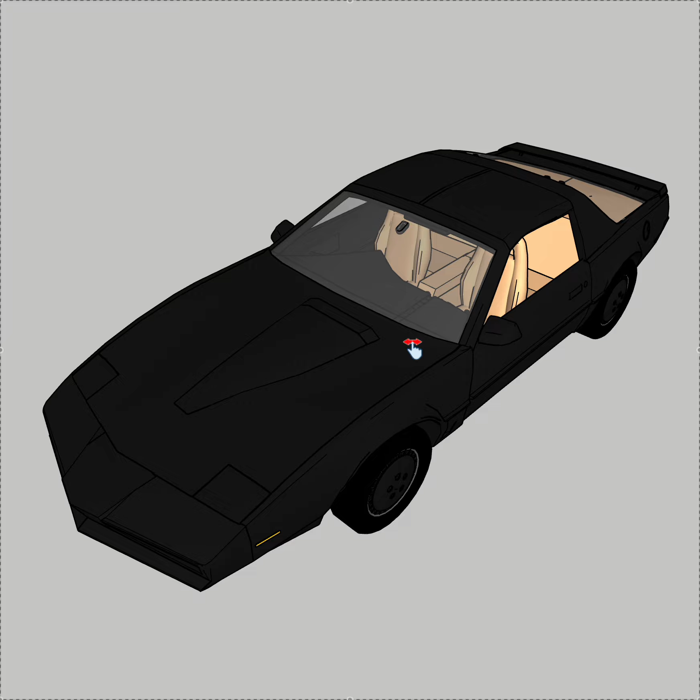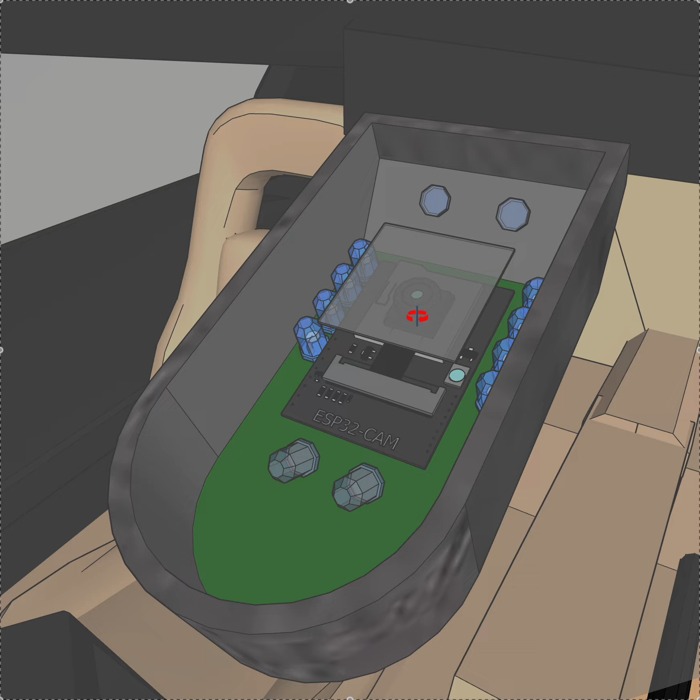Guys, this is my newest idea or project: a light and rain sensor. Here are a few infrared LEDs, a camera module, and a film to protect the camera from daylight. The camera records only the infrared.

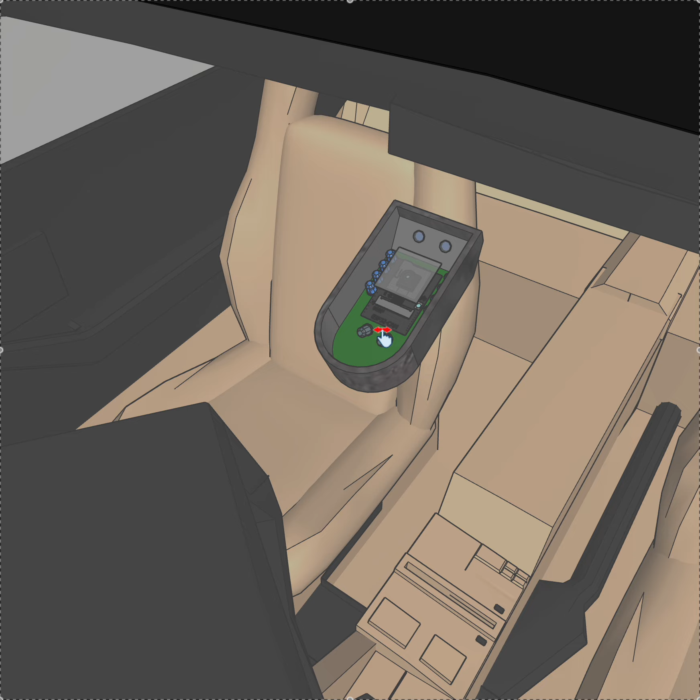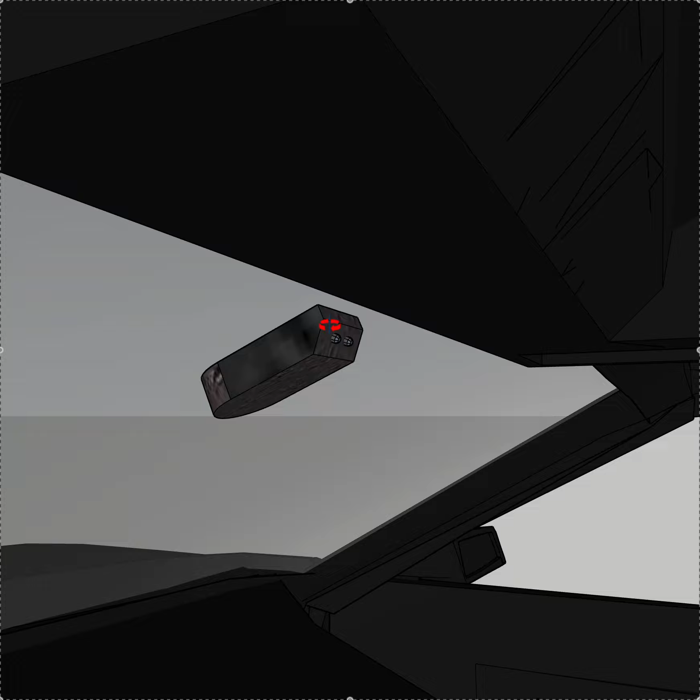So these 8 infrared LEDs illuminate the outside of the windshield, and the camera records the windshield, and a Python script or software detects if it's dirt or rain. Yes, and these two thingies here are light sensors for the front, and we have here another 2 sensors for the inside.

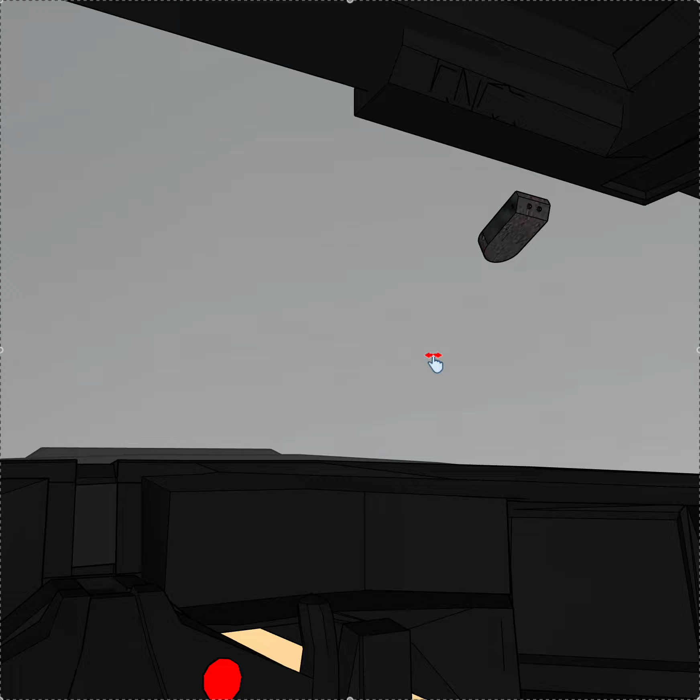So that means when the outside is dark or when it's night, the dashboard will dim the brightness to a minimum.

Another function is when a car is on the street, this module registers or detects the light, and the dashboard electronics can then automatically switch from high beam light to normal headlights. So it's a rain sensor and a brightness sensor, and the rest is done by the dashboard electronics.

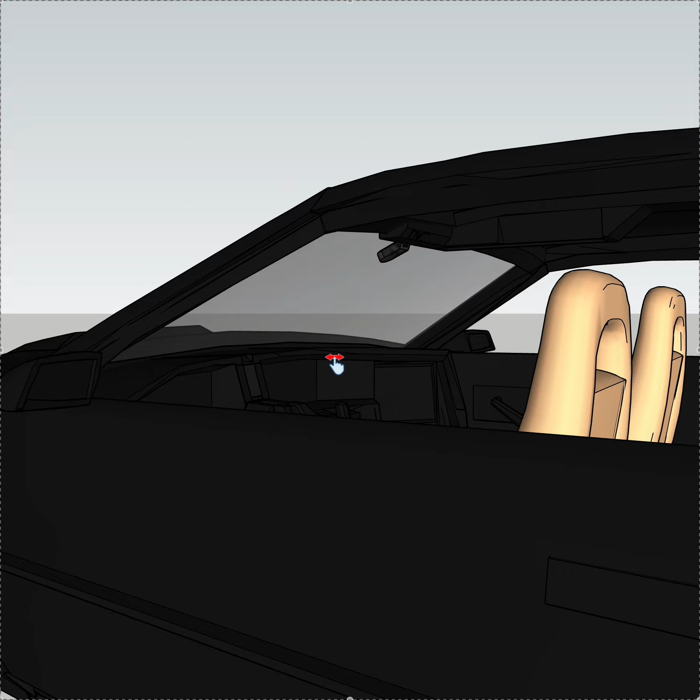Yes, you can do what you want with the data. Maybe you can trigger an audio file when it starts to rain. Then K.I.T.T. says, oh, it's starting to rain, or something like that.

Yes, and this is my newest idea: a rain and light sensor for the windshield.